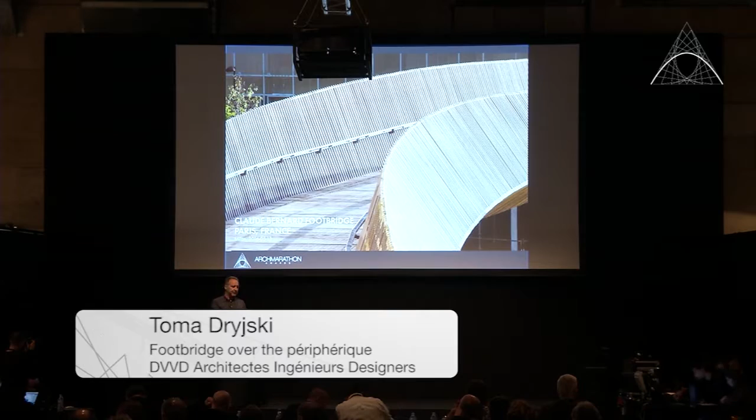I'm Toma Dryjski, partner of DVVD Architects and Engineers office in Paris. This is about a project of a footbridge in the north of Paris. It's along the ring road called the périphérique, the first ring road of Paris, which is the limit between Paris and the suburbs.

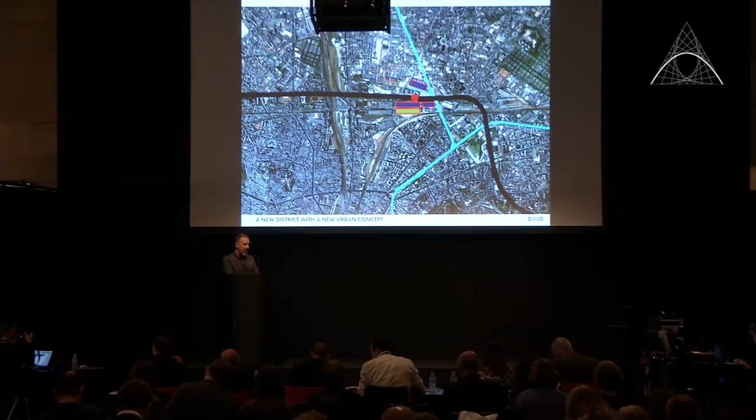This is taking place at the north of Paris, which was for a long time out of the urban renewal, and now we're in a space which is, for the last 5 years, in a quite dynamic renewal with a project led by OMA, which is in green, and the blue part, which is quite new in Paris, that is an urban project which is done on both sides of the ring road at the same time by the same urban planner. And there we have to do the bridge linking these two parts.

This made of this bridge not only an object but also a public space. And this project is issued from a competition that we won, and the data of the competition were to link as directly as possible a new transportation hub and a new commercial center.

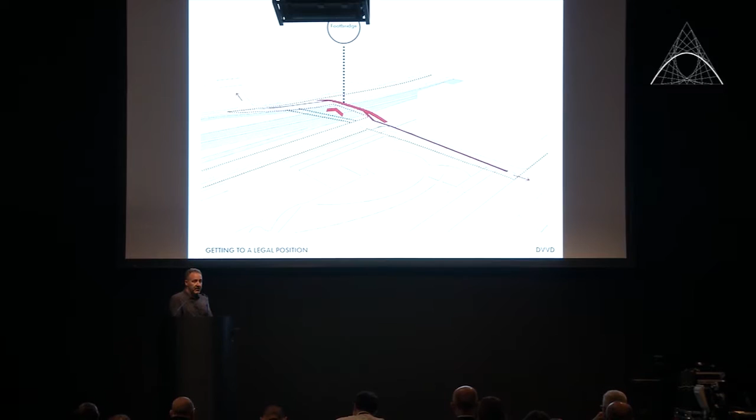This was done by the urban planner, and you have the crossing and you have two long ramps, but when we overlapped the authorized zone to build, we had a part of the crossing which was out of it. It had two problems, the legal one, and the other one which was to have the good gauge, because you have a way out of the ring at this place. So it would have made a very important object. So we just simply slid it back to the limit of the zone, and this made something that changes the perspective that was expected by the urban planner.

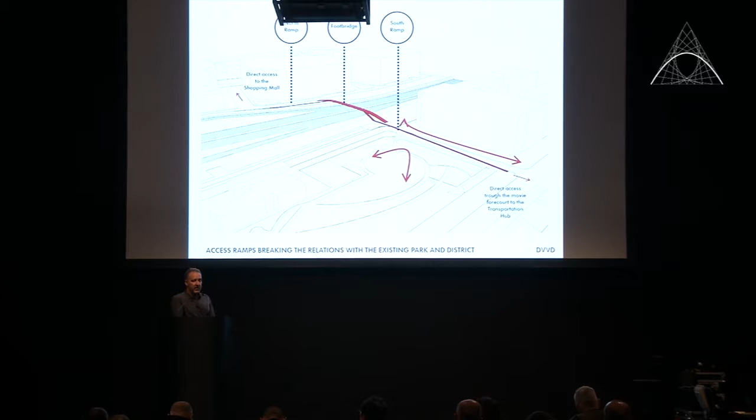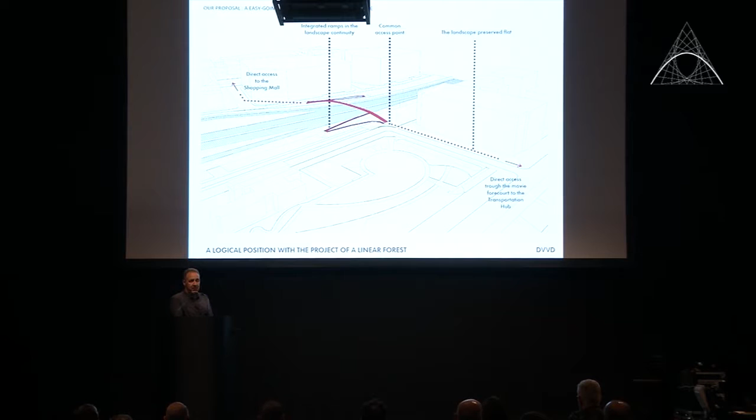We had also two ramps. We understood the idea of an elevated promenade, but we thought that it's going to be cutting the relations along the ring road and between the ancient part of the district and the new part of the district. So we proposed, and that was one of the key points that made us win this competition, to bend the ramps along the ring road, because we thought that the directness of the way was the same on the ramp or on the flat floor. More so since the same urban planner was suggesting to do a linear forest along this ring road to pacify it.

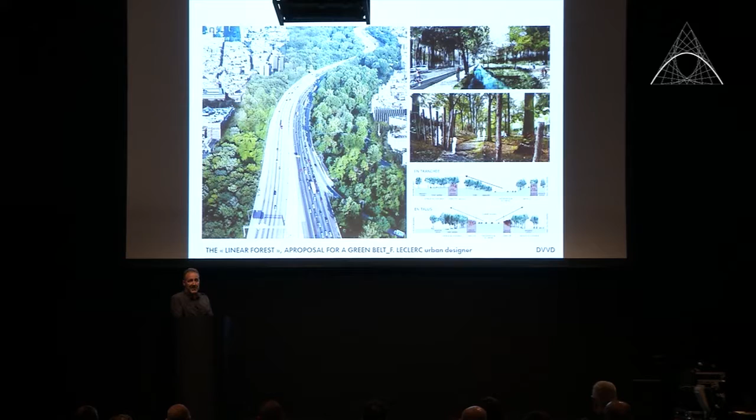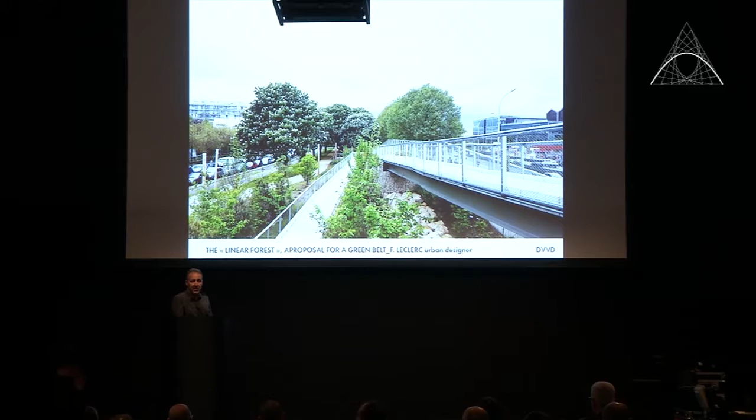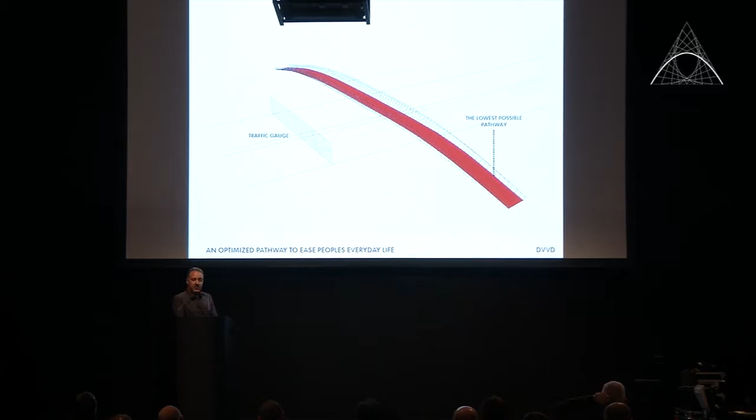The other point with these ramps was an economical point too, because it was much cheaper to build on the ground, on the soil. We have only this part which is built like a bridge in this case. In the other case, we would have to build over 800 meters of bridge. We always think of this kind of space, which is a public space, as an easy space to practice. So we calculated the lowest possible gauge and the easiest possible pathway, which gives a specific shape to this object.

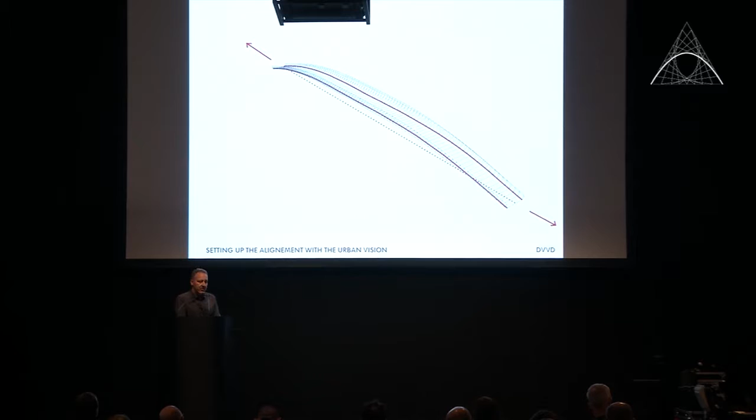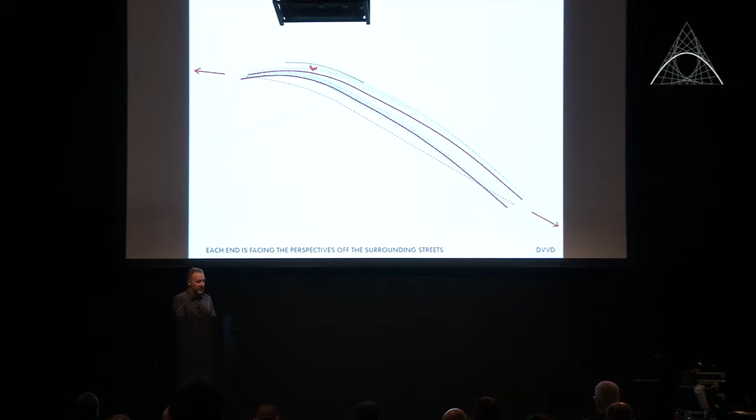The other thing, working on the perspective views and on the ease of the crossing of this public space, was to bend it at one end to find again the continuity of the perspective, the continuity of the roads that were just around. This started to give a specific shape, something which is uncommon for a bridge. And we were also convinced that this bending would be something interesting in this public space, which always has a dynamic practice. It's not a stable place. It's a place where you always cross one way or the other.

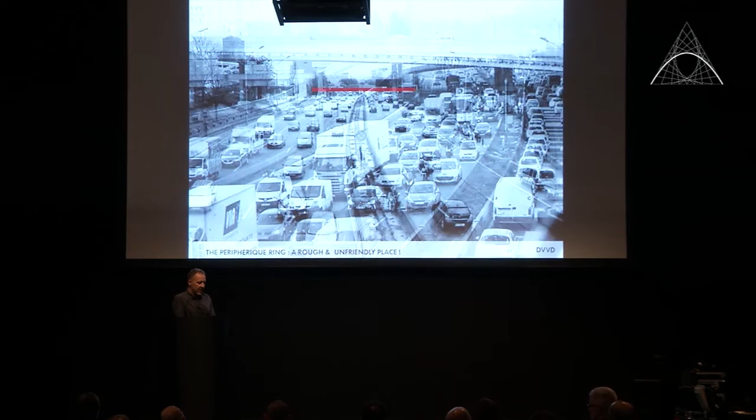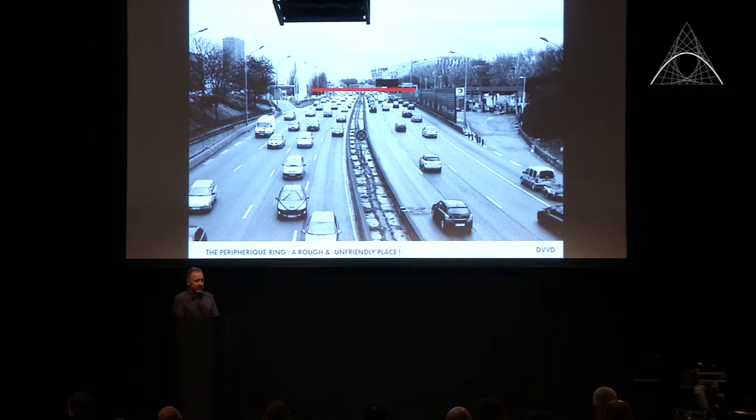The other question was about the context, which is this road. We observe that some people are looking from the bridges at it like a river, but this is a metallic river, about 300,000 cars per day going through there. So we had to find something which would be at the same time symbolic, because this is part of the ambition of Paris to do this Grand Paris project, and also we have to care about the people crossing. It's not the kind of landscape we're used to working in.

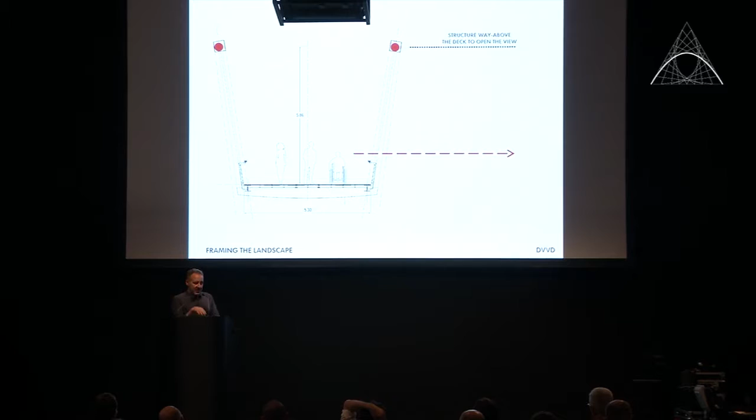With the structure we had for our project, we have to have this clear gauge. We have to put the structure over the footpath. This allows us to have the lowest possible crossing. But when you do that, you do an opening and a framing on the landscape, which in our sense wasn't possible in this case. And as we used to work in this kind of space, urban crossing, we think that it's better in these cases to frame more the sky and filter the view on the context.

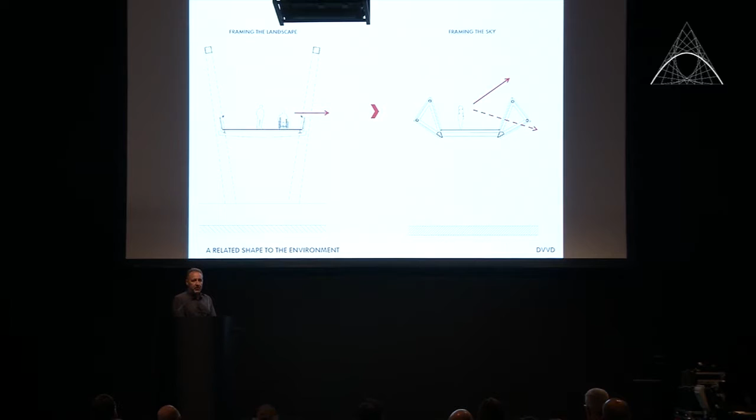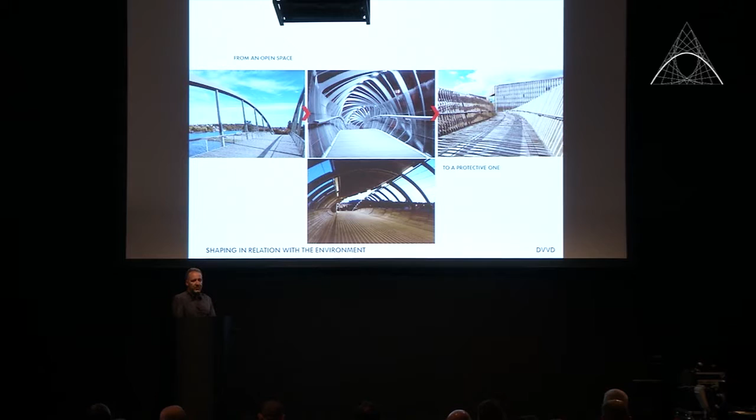We experienced that in two other bridges. One crossing a bus station where people were throwing washing machines on the buses, and the other one on rails where we have to protect also the trains. So there we had to have this double relation to protect the cars and to give a smooth environment to the people crossing. So it gives something wrapping you when you're crossing, but not completely closed. The guy was supposed to look the other way to show that you can see through the cladding.

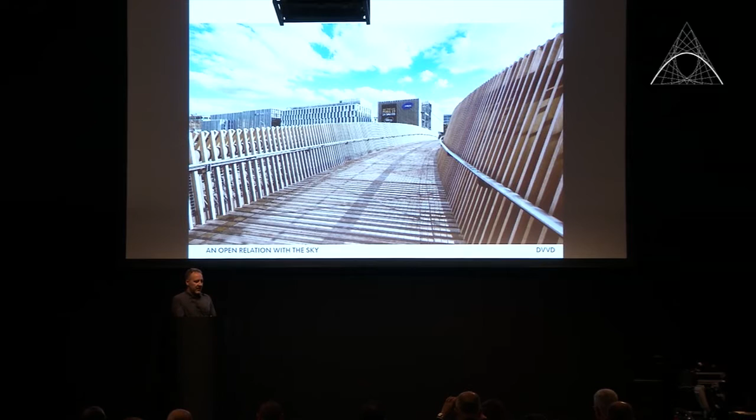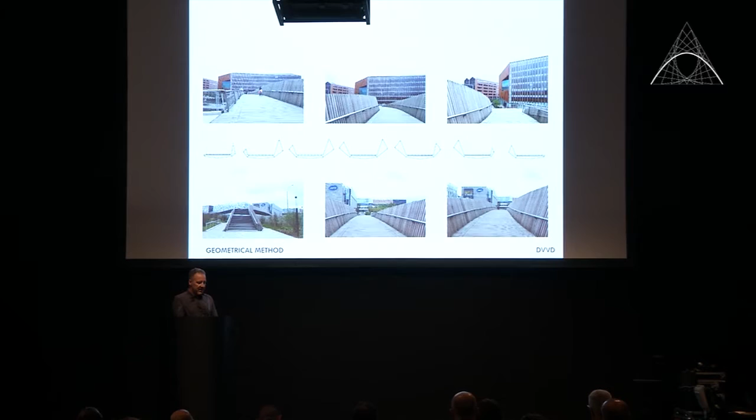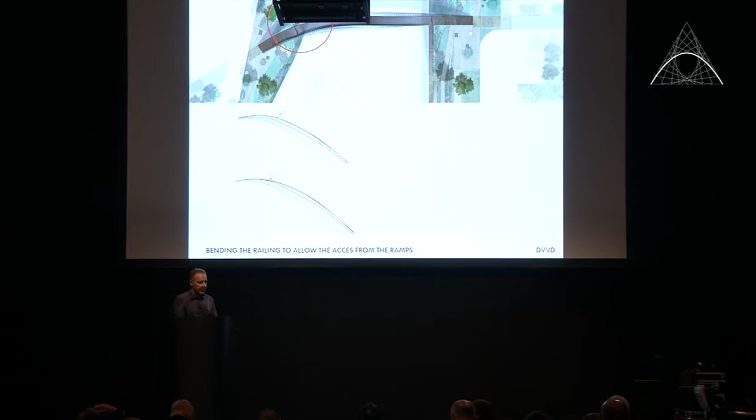And we had also the feeling that having these two rails really high would do something too closed. So we went on looking how to play with these rails and play with this structure, with having something which is just shifted. When you have one high, the other one is lower. And this had another reason too. The simple reason was also to connect the flat floor with the ramp on both sides. So that's what drove us to this twisted shape.

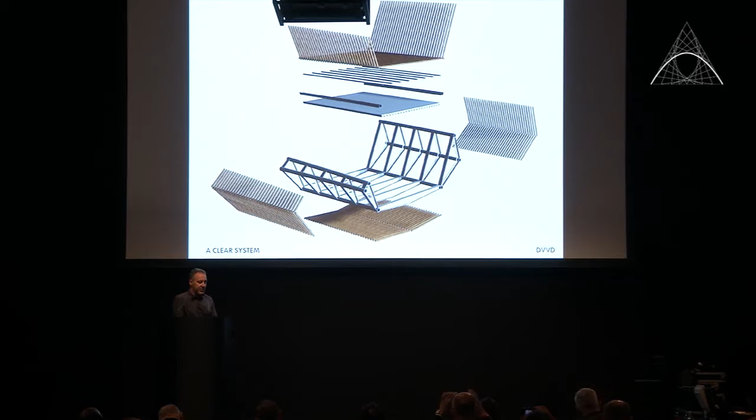From the structural point of view, we worked with very simple elements because we had quite complicated efforts to solve. So we preferred to start with a very simple structure that we can afterwards transform, but not transform the global design of the object. In that case, we were quite lucky because bending the bridge helped us to maintain the main efforts of the bridge.

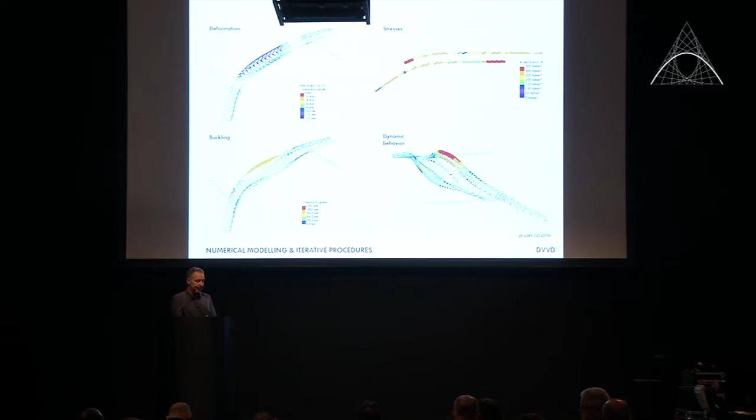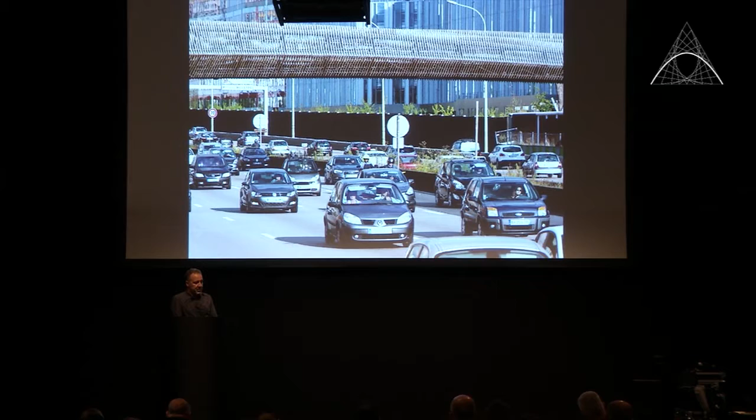This twisted shape is giving its particular aspect. And also we chose the cladding in wood, which is quite new, because we were looking for the warmth that it could give to the people going across, having this shape which is in volume and having a natural strength with this shape. We had also to think that we won't have a middle pile, not to disturb the traffic, so we had to recalculate all the bridge, having the idea working as an object and working on the construction phases with three parts.

In this kind of object also the know-how of the contractor is quite important, because if you want to follow the design and do a precise design, you need to have someone you can talk with. And in this case we had to do a mock-up of the bridge, because we did the lifting of the bridge in one night, and I just realized this morning that it was exactly a year ago last night. So we did the two landing parts. We had to put the bridge on the side of the highway, then clad it, and then we have a lifting in one piece of 100 tons. It's about 60 meters long.